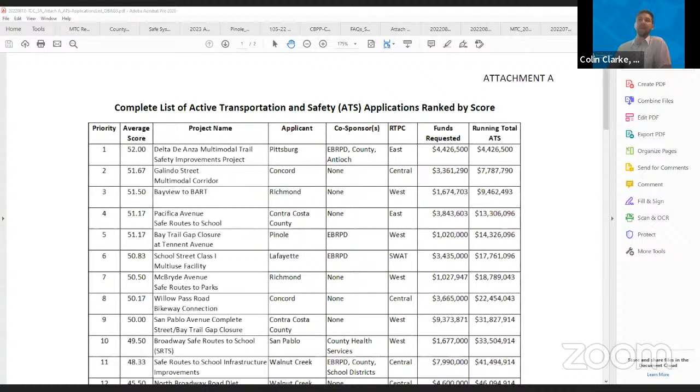This went to the TCC last week on August 18th, Thursday, and some feedback was received in regards to that, and then it'll go to Planning Committee September 7th and the board after that.

You can see the top 11 projects did make the proposed nomination list, with the exception of item number 10, number 9 from the county. The review panel discussed this, and because of the cost of the county's San Pablo Avenue Complete Street project, the SS4A, Safe Streets and Roads for All, USDOT grant program was chosen as a potential next step to get that project funded.

All right, thank you for that update, Colin. Do any members of the committee have any comments? Just raise your hand, either virtually or your actual hand. Corey, is this comments for the entire item, or just this section? Colin, are you accepting—I guess if you respond to Corey's question—is this the end of the OBAG presentation? Yes. Okay.

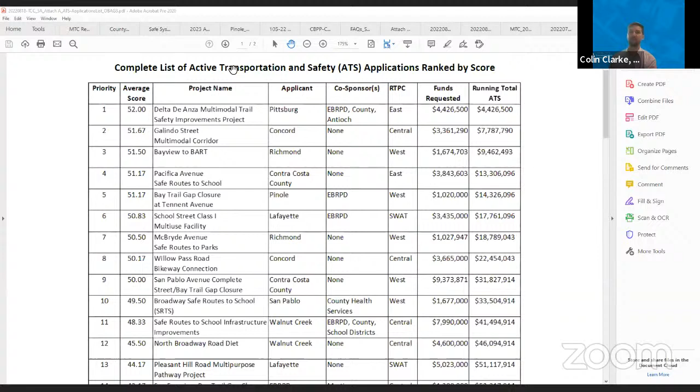So maybe I'll direct that question to Colin then, if it's a CCTA related question. I think it's something you might bring up during agenda item D2. The city will be presenting the complete streets checklist, and that's one of the ways that can address some of that scoping conversation. And from an OBAG 3 standpoint, I don't think CCTA has design guidelines required other than those that are encouraged from the countywide bike and ped plan on CCTA's website.

I'm sorry, is that going to be, you said agenda item D2, is that part of this meeting or a different meeting? Yes, this meeting today. Got it, okay, thank you. And I guess the other thing to look at too is if you go to the countywide planning webpage, there's a Vision Zero webpage, and there's a toolbox there that shows different treatments. So that's the other kind of design guidelines document that CCTA has in regards to these type of projects. Great, thank you.

I see Committee Member Dougan's hand up. Sean. Yeah, hi, Vice Chair Dougan here. I think maybe Colin, you might have just answered a follow-up question to this, and that is the link you just directed this committee to. To me, the general question I thought I heard was what are the procedures in place that ensure that what's being applied for is actually being implemented?

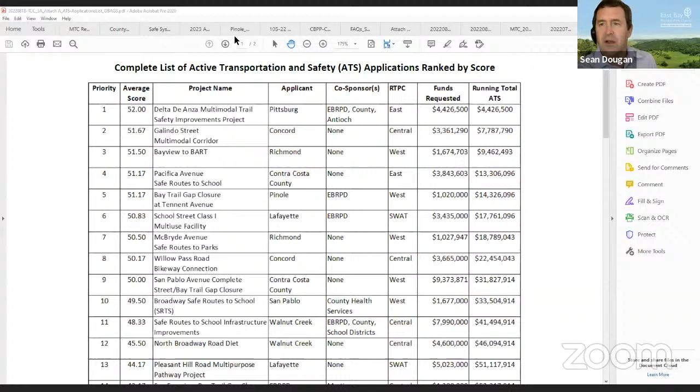Yeah, I appreciate that. So I guess there's a funding resolution that ultimately will be taken and reviewed by the planning committee and the authority board, which has a one-page attachment, typically with a more detailed scope of work. That's what CCTA can use to make sure that scope is met by the local agency project sponsor, and that's typically Measure J funded projects. This is OBAG 3, so it might be a little different since there's not necessarily an interagency peer review process at the 65% design stage, which is typical of Measure J funded projects. But still there would be a funding resolution with a scope of work that would include that.

I see Eric's hand up again. Eric? No, sorry, I just need to put that down. Thank you, okay.

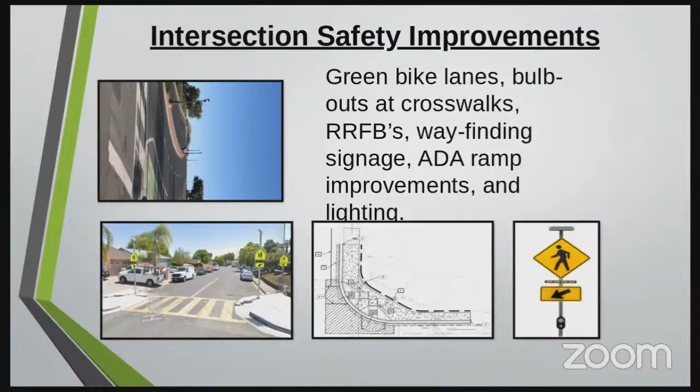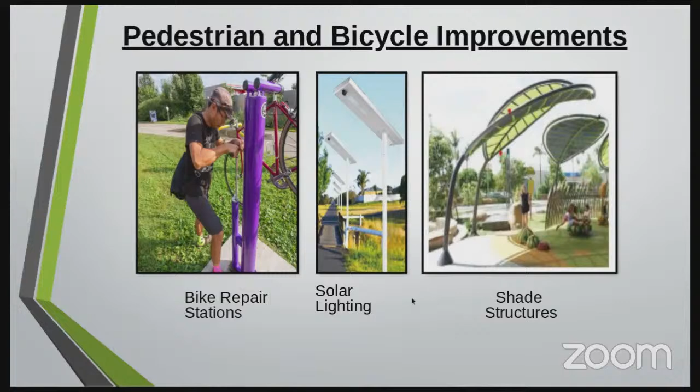In addition to the trail, there will be a lot of improvements: bike repair stations, solar lighting, shade structures, and a lot of these address the whole safety aspect, plus also green climate change considerations.

Similar to certain trails we have throughout the state, there will be some blue light emergency stations, additional wayfinding signage to show people where to stop by key destinations and where the trail connects, and improvements to some of the fencing along the Delta De Anza Trail as well.

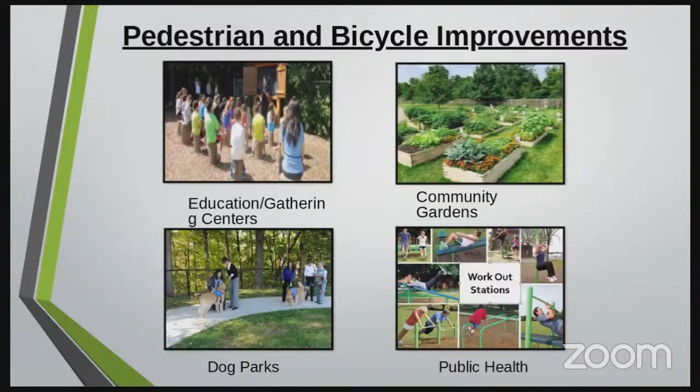It's going to be a collaboration with some school districts to incorporate educational gathering centers, community gardens, potentially dog parks to deal with the green waste, and also add some workout stations for the public.

Here's a few exhibits that we have. Exhibit A shows some of the improvements along one trail in front of a school: workout stations, community gardens that coordinate with the schools, and some green bike lanes to reconnect the trail through this quarter-mile radius back onto the trail.

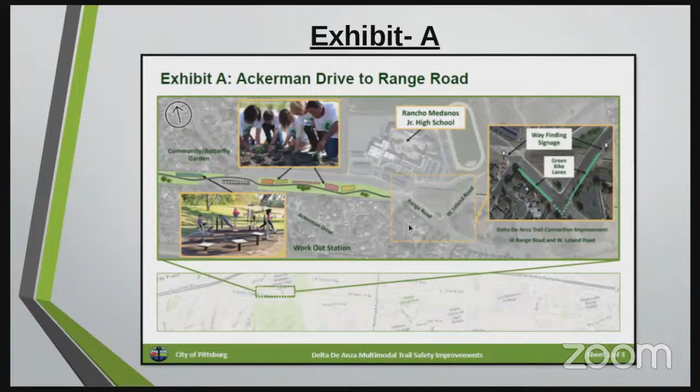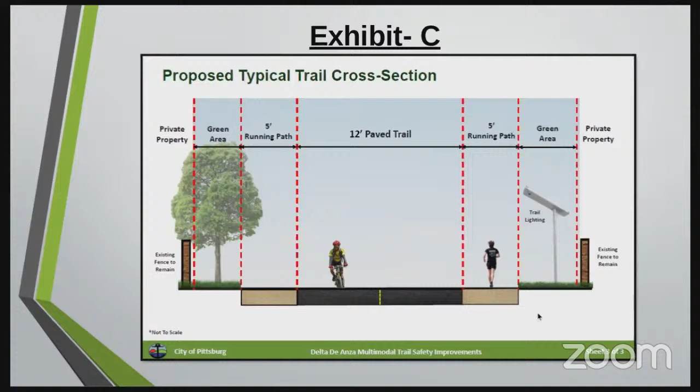Currently out there right now, the typical cross section has a paved path. There are some improvements that need to be made, whether it's drainage or repairing some of the patch pavements, also the running paths, and to really make some improvements for the dead space zones currently on the trail. So the main objective for all of this is to really tie the communities together and to utilize this path.

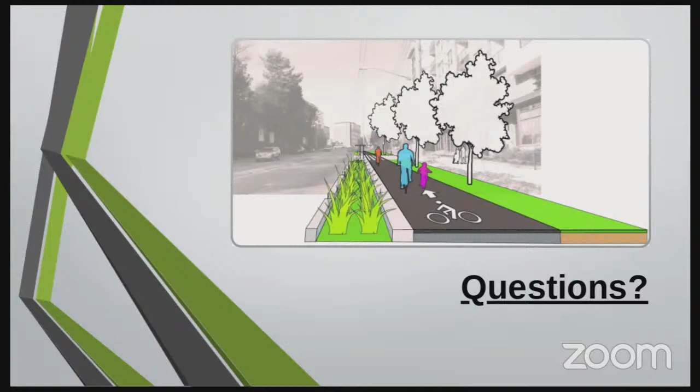As of right now, this trail alone, if you average all the PDAs, EPCs, it's a little bit over 70%. So per our Pittsburg Move Active Transportation Plan, we had a lot of outreach. There had been more than 50 outreaches throughout the last 3.5 years. And this comes up as one of our main priority projects within the city.

So the idea is to make this a regional project. Let's improve 16.3 miles of this trail, reconnect these communities within 3 areas to utilize the space to reach their key destinations, healthy lifestyles, peds and bikes, and I'm looking forward to implementing this project.

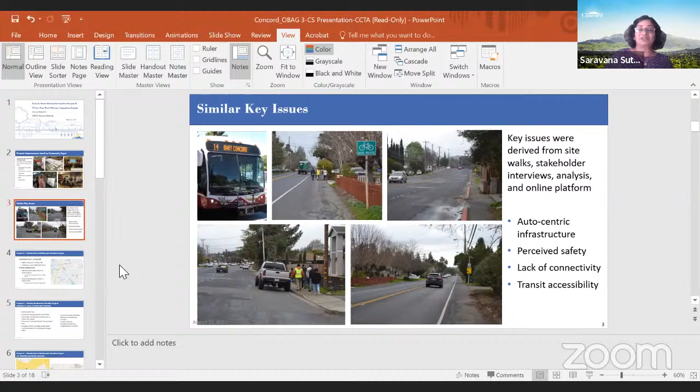So now looking at this, basically these two projects together form part of a larger network of bike and pedestrian improvements the city is looking to do, especially in the downtown area, connecting to many schools around the downtown area and to the businesses within downtown, and also connecting better to the BART station. So these two projects are kind of pieces of the puzzle, but eventually the city is looking to tie and make improvements to the entire network, so we will have a better, safer bike and pedestrian network to access all the businesses and schools and to the transit centers.

So now talking about the Galindo Street Multimodal Corridor Project, this is between Salvio Street and Clayton Road, and we are also looking at the Clayton Road section where we have the opportunity to improve for bicyclists. So the total project cost we are looking at is 4.2 million, with 20% matching funds coming from the city.

And in terms of the specific improvement, as you can see, between Galindo - I know this question was raised earlier in the meeting - between Salvio and Willow Pass, we are looking to do a class 2 buffered bike lane, combined with a raised landscape median. And between Willow Pass and Clayton, we are looking to do 6-foot landscaping on both sides, separating a class 1, 10-foot shared bike and pedestrian path.

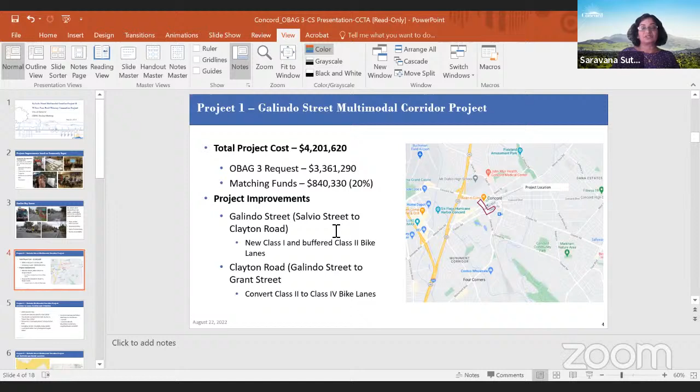In terms of relation to local policies and priorities on the complete street checklist, you can see the number of plans that have identified and included this improvement: the General Plan, Downtown Concord Specific Plan, City Bike Ped and Safe Routes to Transit Plan, and the Monument Community-Based Transportation Plan. The LRSP, going tomorrow for adoption by the City Council, also includes this one.

As I mentioned before, this connects to existing and future bike lanes in downtown Concord, which facilitates better and safer connectivity to all the businesses, schools, and to BART.

In terms of the regional active transportation network and safety analysis, as you can see on the slide, this is part of the regional AT network. The safety analysis data shows a high level of collisions, as you can see in the highlighted areas. So this corridor is located in a high collision area.

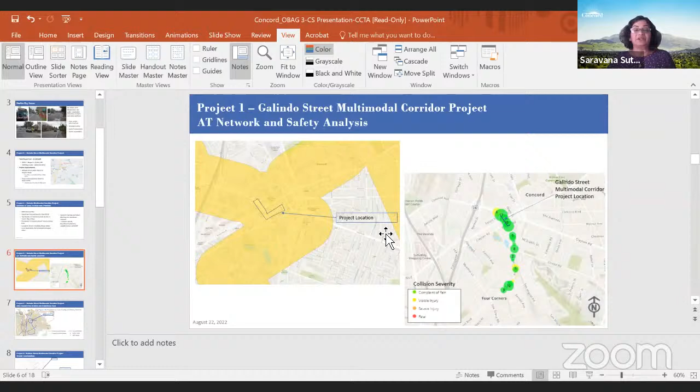The map scale doesn't show the length or linear portion of the project, but it's behind the dot here, as my cursor shows. It's part of the 2018 Countywide Bike Ped Plan and its proposed low stress countywide bikeway network.

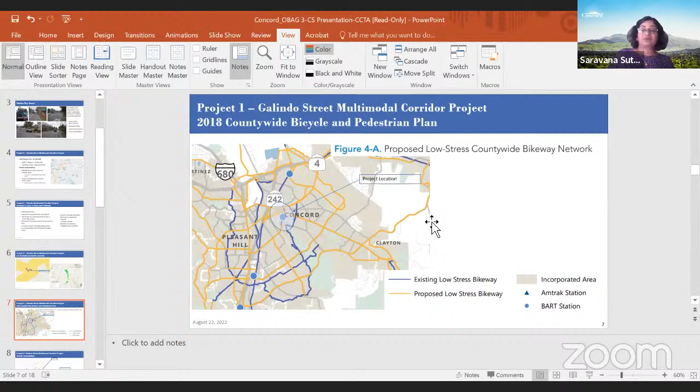For transit coordination, all of the buses that travel through connect to County Connection, go through the corridor, and connect to the BART station. It is also part of an equity priority community and part of the PDA, as you can see here.

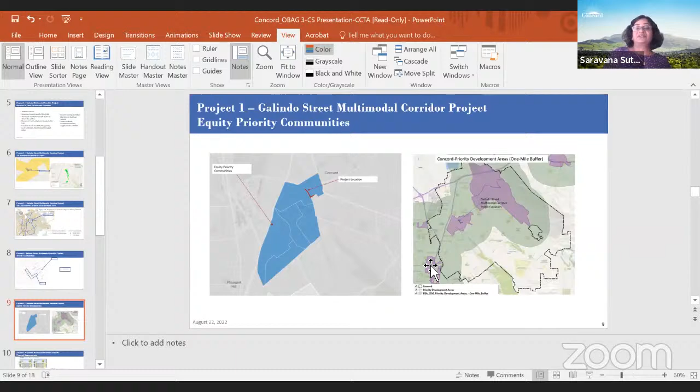So ultimately, the type of improvement we are proposing, as I explained, highlights a 10 foot shared use bike and ped path on both sides of the street, along with a buffered class 2 bike lane as the right-of-way dictates. We're converting the class 2 bike lane into a class 4 bike lane to the best level possible. This will all be finalized at the design stage in collaboration with the community and other key stakeholders.

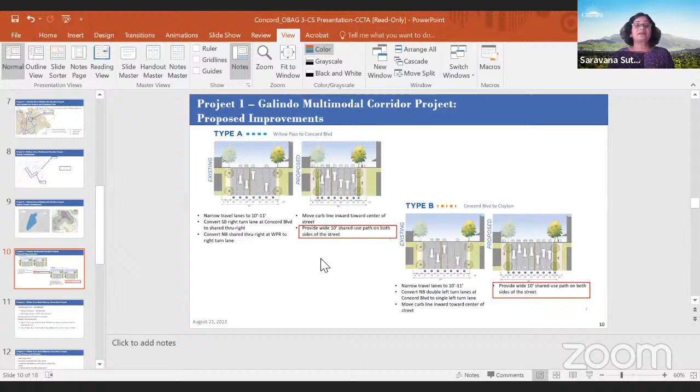So with that, I'm moving on to Willow Pass. I will stop here if the committee has questions.

Thank you, Saravana. Anybody have any questions on the first project here, the Galindo Street project? Any committee member questions, comments? All right, seeing none. Any public comment on this project? Okay, don't see any as well.

So, Saravana, please continue with the Willow Pass Road Bikeway Connection Project. Thank you, Chair.

The Willow Pass Road Bikeway Connection Project costs about 3.8 million, with about 11.47% required match coming from the city. This project is in a little bit more advanced stage; it's in design phase and anticipated to go to construction in 2026.

In terms of project improvements, we are proposing a class 4 two-way cycle track on Willow Pass between Landana and Parkside Drives. This is a big highlight. Because of right-of-way constraints, we are proposing a class 2 bike lane on Parkside Drive, which will connect to Willow Pass and to the bike lanes on Salvio Street.

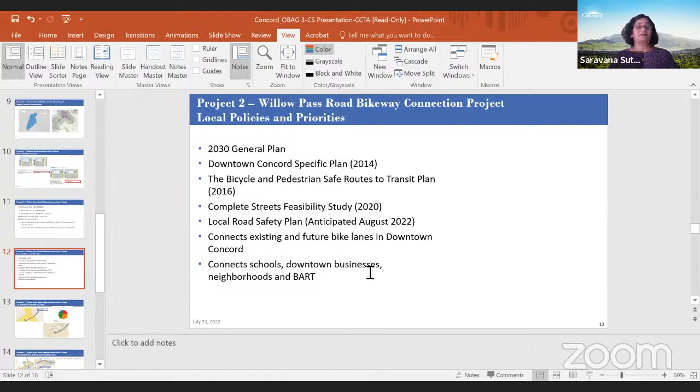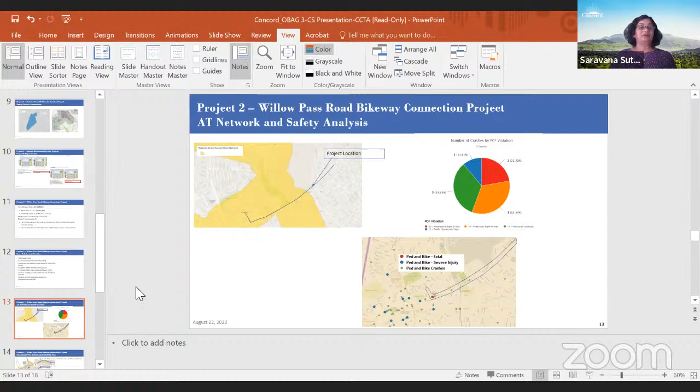This is also part of the Countywide 2018 Bike Ped Plan, and it's part of the low stress Countywide Bikeway network.

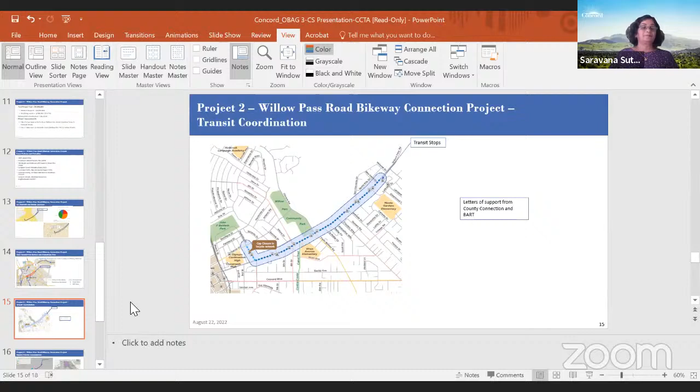On transit coordination, there are many stops on this corridor. This is a regional route, and it leads to connecting to the BART station. It is connecting to EPC, and it's very much part of the PDA.

In terms of the improvement, it includes a two-way cycle track from Parkside to Landana, and there is a road diet proposed by removal of one travel lane from Farm Bureau to Landana. It includes Class 2 buffered bike lane as much as possible on the one section where the right-of-way constraint exists.

So with that, I'll be open to questions. All right, thank you, Saravana. Questions from the committee—I see Committee Member Olson's hand up.

Hi, Bruce Olson, regular bicyclist. Those of us who regularly ride our bicycles are hoping that the Class 4 bike lane that is planned to end at Landana will be continued up to the Delta de Anza Trail as part of the development of the former Naval Weapons Station. Thank you.

All right, thank you, Committee Member Olson. Vice Chair Dugan. Hi, Vice Chair Dougan here. Saravana, does this project also include—if I recall—a treatment where the Contra Costa Canal Trail meets Willow Pass? I'm thinking it was a HAWK signal or some kind of crossing that was proposed, or am I thinking of a different project?

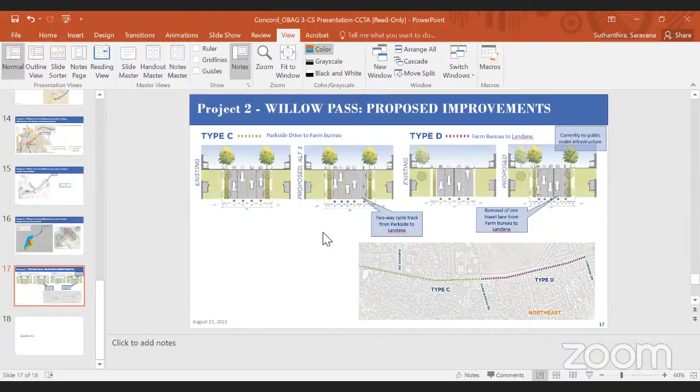All right, any other committee member comments? Could I follow on to Committee Member Dugan's concern with the crossing of the canal trail at Willow Pass as part of this project? Yes, we need that crossing to be safe, and I don't think the city of Concord is particularly concerned with building that crossing. So that's Mr. Dugan and now Bruce Olson expressing concern. Maybe the city of Concord could be concerned with that crossing also. Thank you.

All right, thank you, Committee Member Olson, for the comment. Any other comments from committee members before I move to the public? All right, seeing no hands up for committee members, I'll move on to the public, and I see Eric Owens' hand up. Eric? Hello, Eric Owens with Bike Concord.

For the Galindo project that is proposed, I believe that is the area where there was a fatality a few months back. There wasn't a lot of details on there. Is the proposal to have a paint-only bike lane on Galindo? If that was the proposal, I would be concerned with that. I think that is an especially busy area, and I do not think anyone would feel safe riding their bike in a paint-only bike lane on Galindo Street.

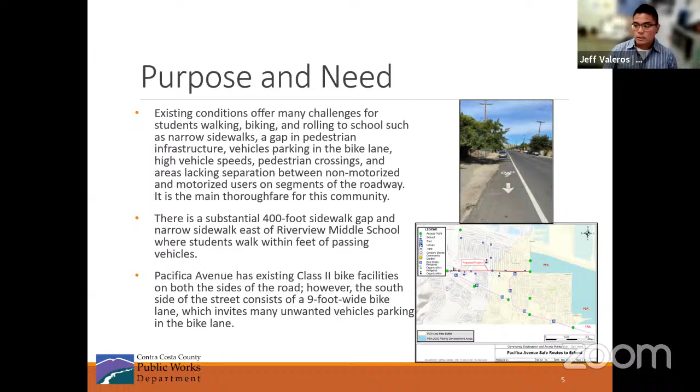This project proposes replacement of 2,400 feet of existing Class 2 facilities on the south side with a protected 2-way cycle track, as well as closing a 400-foot pedestrian network gap through a new 6-foot sidewalk, and construction of widened sidewalks, curb extensions, and raised crosswalks with high visibility striping to help students cross to access their schools and help slow vehicular traffic.

Do you want to pause here, Robert, or shall I go straight into the next one? We'll pause real quick and see if anyone has any questions on the Pacifica Avenue Safe Routes to School project. Any committee member questions, comments? Any public comment on this item, on this project?

Oh, I do see committee member Weeks, your hand up. Yeah, hi, sorry, just really quick, I'm too slow on the draw. No worries. I'm pretty interested in barriers and removing them or putting them in where needed, and there was a brief mention of some kind of barrier proposed at the cycle track side. Has there been any exploration of what kind of barriers these would be for here? It looks like a K-rail in that drawing, but I know that's probably just what the program gives you to drop there.

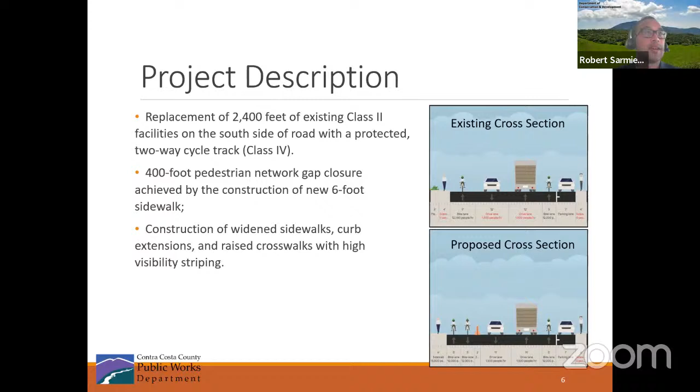Sounds good. The San Pablo Avenue Complete Street Bike Gap Closure, that was close. I've also presented this to the CBPAC, I think for ATP Cycle 5 and maybe 6. This project is along a 3.2 mile segment of the San Pablo Avenue corridor between the unincorporated communities of Rodeo and Crockett, from Pacific Avenue to the west, all the way to Pomona Street in the east. This project is located in the WCCTAC RTPC.

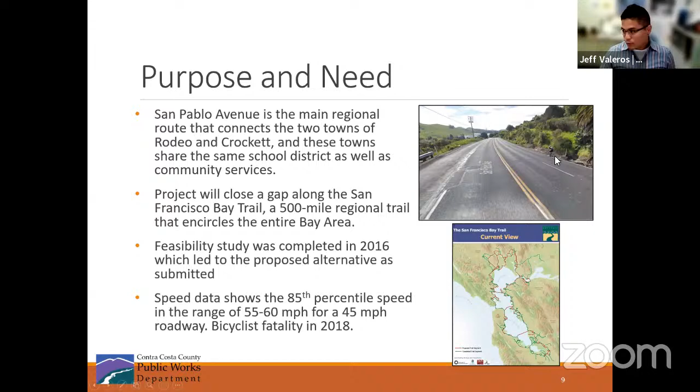The speed data shows the 85th percentile is in the range of 55 to 60 miles per hour for a 45 mile per hour road, and there was a bicycle fatality that occurred in 2018. You can see in this photo from Google Street View that there is a bicyclist here. This project is a 4-3 road diet for the 3.2 mile segment to install a Class 1 shared use path along the northern segment.

We're proposing a concrete barrier, especially given the speeds out there. This project also includes a 1,000-foot sidewalk gap closure in the Rodeo area, as well as bus stop improvements and a pedestrian hybrid beacon to help with local pedestrian circulation. And with that, I'll leave it open for any Q&A.

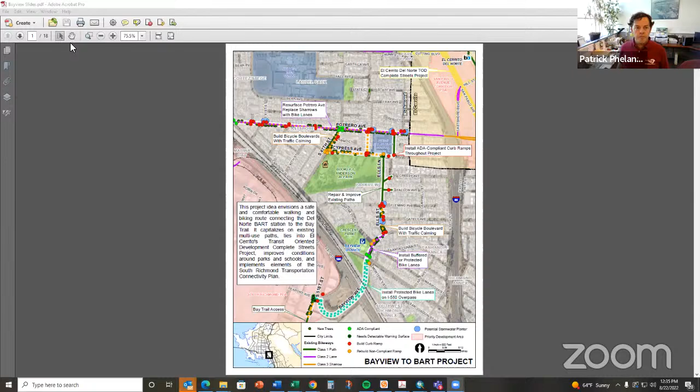This project envisions a safe and comfortable walking and biking route connecting the Del Norte BART station to the Bay Trail. It capitalizes on existing multi-use paths, ties into El Cerrito's transit-oriented development complete streets project, improves conditions around parks and schools, and implements elements of the South Richmond Transportation Connectivity Plan. There's kind of a lot going on this map, trying to show everything that we want to do.

Bike lanes on Potrero Avenue, bike boulevard treatments, the orange dashes on some of these smaller connector streets. Ells Lane is an existing multi-use path that is in need of upgrades and repairs. There's another small path along the east side of Stege Elementary. A short segment of buffered or protected bike lanes on Bayview, and then protected bike lanes on the Bayview overpass.

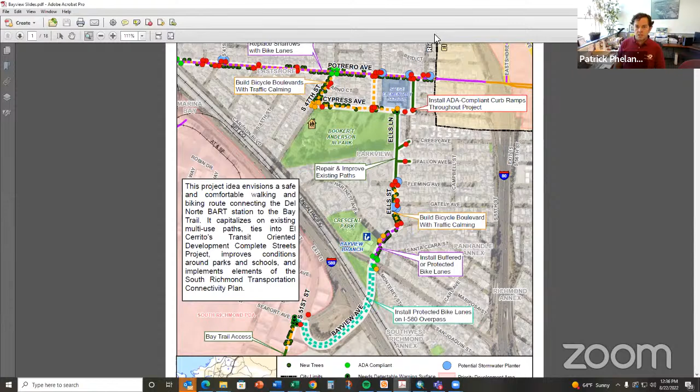One of the reasons we've selected this project is that we've been working with MTC on a quick build design for those bike lanes on Bayview Avenue.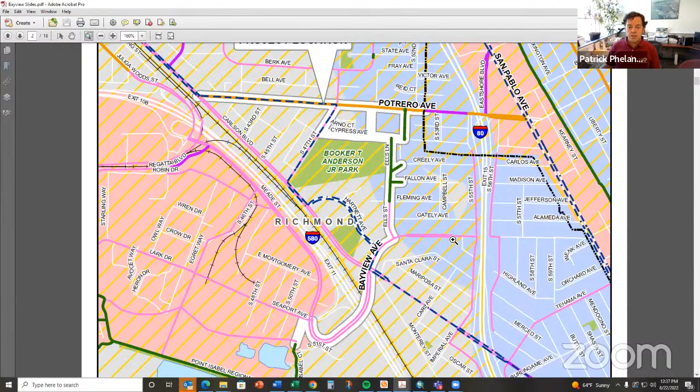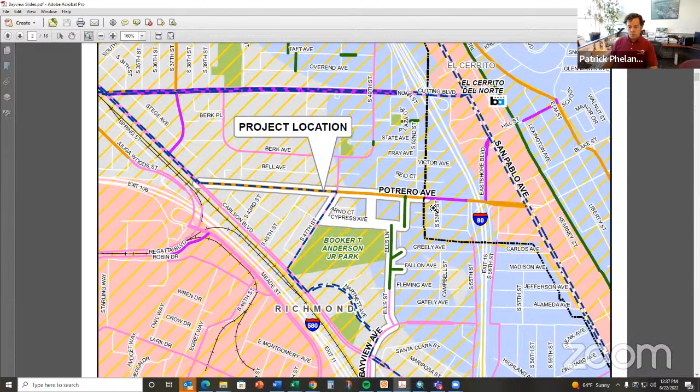And we're also connecting two of our PDAs, the South Richmond PDA on the left, and the San Pablo Avenue corridor PDA in El Cerrito on the north end of the project corridor.

Here are some quick clips of the design we were working on with the consultant hired by MTC. Here's a view of the Bayview and Carlson intersection, proposing a quick build protected intersection. This is a challenging location with a lot of vehicle traffic. There's no sidewalk on the north side of the Bayview overpass, so that also means there's no ped push buttons, which creates some interesting things for implementing the bike lanes.

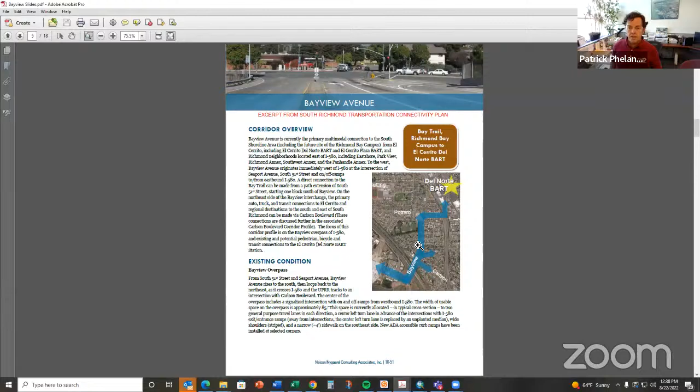Another reason we selected this project is that it implements the South Richmond Transportation Connectivity Plan. This blow-up pretty much outlines the corridor we are focusing on, using Potrero Avenue and East Shore to connect up to Del Norte. There's a lot of details in our plan that we are trying to implement.

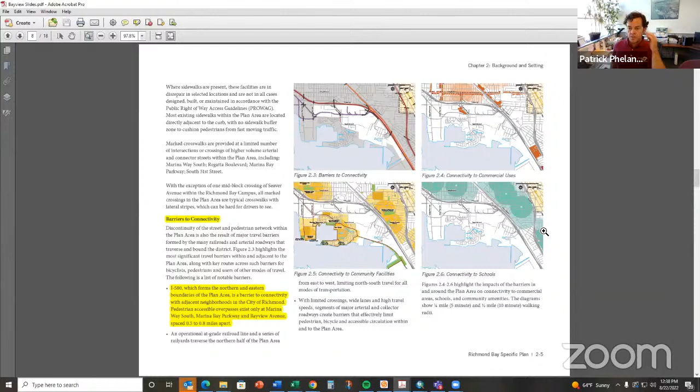This project is also supported by the Richmond Bay Specific Plan, focusing on redeveloping the empty space in the south shoreline between the Marina neighborhood and Interstate 580. You may remember there was the whole proposal to do a UC Berkeley campus extension that's on hold. There's also a Campus Bay development proposal for the area.

Here's some more highlighting. One of the biggest problems we have in Richmond is the freeways acting as barriers to connectivity. So that's a real goal of this project - getting people across 580, getting people from these equity priority communities to safely enjoy the Bay Trail and the waterfront and all the other connections you can get to from the Bay Trail in Richmond. It's not just for leisure - lots of people use it to commute to Berkeley and Oakland.

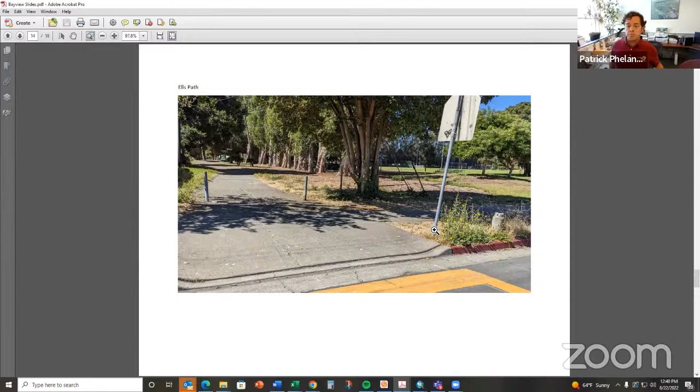This is the Ells path that's just south of that. If you were to turn around right here, you'd be facing right at Steege Elementary School, and that's Booker T. Anderson Park. This end has a nice curb ramp. Here's an example of some of the many pretty significant repairs and upgrades needed along this bike ped path. On the south side, there's no curb ramp at all. So a lot of simple but important improvements we'd like to make.

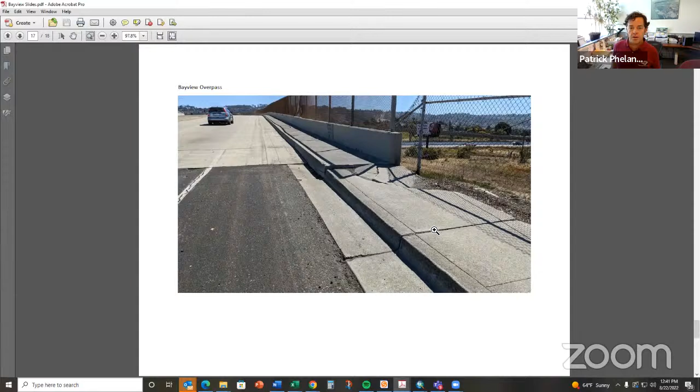Here we are at the overpass where there are significant sidewalk improvements that need to be done. You can also see there's a pretty wide shoulder that should be easy to convert into a buffered bike lane - we'll make the vehicle lanes a little bit more narrow. And then here's the entrance to the 51st Street connector path to the Bay Trail.

There's even one of our Richmond Common Ground etiquette signs up there, the green sign. We got a lot of support from the community, from Caltrans, Park District, John Gioia, City of El Cerrito, Rich City Rides, our own BPAC, our Trails for Richmond Action Committee, and Groundwork Richmond, who we will partner with for tree planting. I want to mention we included trees and some stormwater treatments on this project, and Bike East Bay and AC Transit. So those are all my slides for this project.

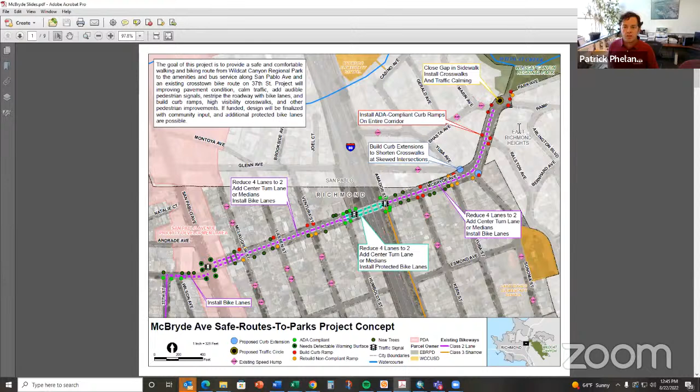Lots of curb ramps need to be built. All the yellow and red dots are showing non-existent or non-compliant curb ramps. There's also a couple of funky intersections that we would like to streamline so that the pedestrian experience is nicer.

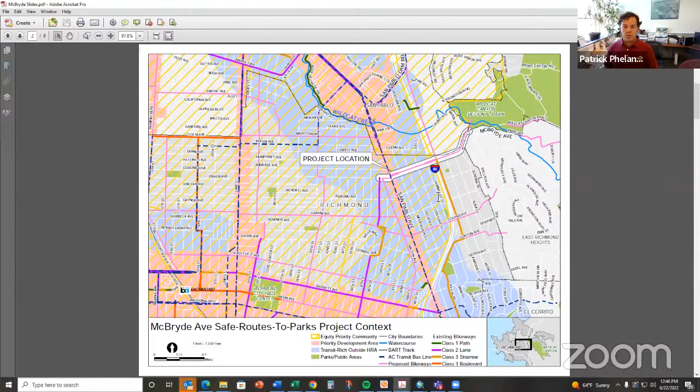Here's that complicated map showing context. The pink lines are proposed bike routes, so you can see this is a proposed bike route in our bike plan. This purple and orange line is what I was talking about, the existing bike routes connecting to our Barrett Avenue route, connecting you to City Hall. Yellow dashing is our equity priority communities, so the whole area to the west of I-80 is an equity priority community. The pink and blue are the PDAs and transit-rich areas.

Another reason we selected this project is that we had a failed slurry seal project several years ago that included several of our proposed bike routes, so we have what I would call a 65% design completed already. Here, this is with the buffered bike lanes. And then a few photos.

This is the funky intersection at the west start of this project, where there's an offset intersection. The idea would be to change that right lane to a right-turn-only lane and fit in a through bike lane there, which would of course be great for bicyclists, but it's also going to smooth out this strange intersection where when you're in that right lane, it's almost like you're going to drive into the gas station. So just having one lane is going to make that safer.

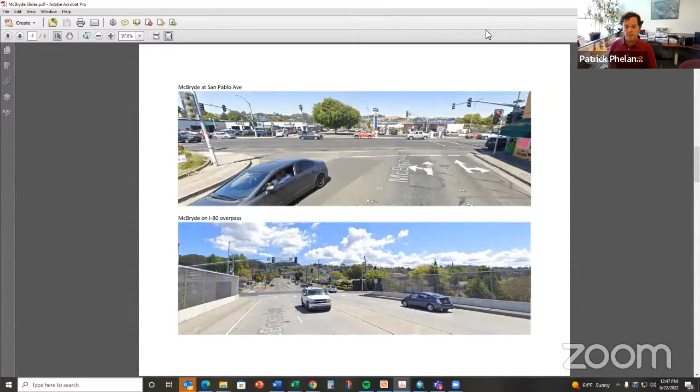On the bottom is a clip of the overpass over Interstate 80. There's no parking, which allows a lot of room for us to put in a protected bikeway, while also making sure we're keeping the appropriate numbers of vehicle lanes to make Caltrans happy. There's an off-ramp just behind here, and a lot of traffic is turning left here onto Amador Street, which leads you to San Pablo Dam Road, another way to get onto Interstate 80, but also a heavy traffic area out to the El Sobrante area.

This is an example of some of the tough ways to get through here on foot. There's these funky skewed intersections. There's not really a direct, obvious path of travel. There's no curb ramps. The road is overly wide.

So we're thinking of even closing off this little end of Glenn Avenue and turning it into a cul-de-sac so that there would be a nice sidewalk path of travel for people on foot. Also just provide some traffic calming for the neighborhood.

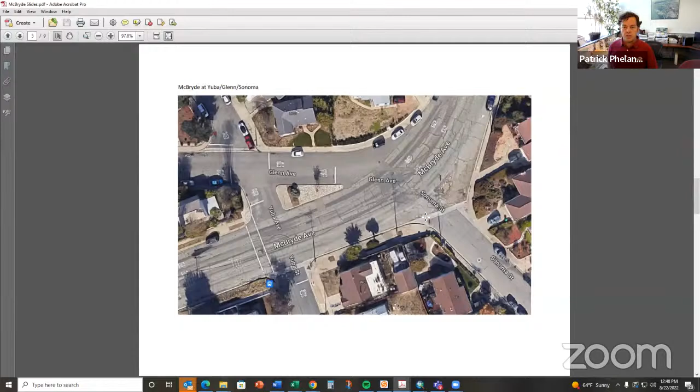Similarly on the east side of the road at Sonoma Street, some kind of bulb out, either concrete or a quick build version, to make things nicer for pedestrians and safer. Here's some pictures of those same locations.

Another thing we'll be using for our match on this project is that we've had a lot of complaints about the pavement on this segment. It's really torn up, and our in-house paving crew has added this to our paving schedule. So we would like to combine funds for all of these active transportation improvements with doing some of our own paving in-house.

And then also this intersection, this is the main entrance to Alvarado Park. If you don't know, Wildcat Canyon Regional Park is a really large hillside park, but then there's also Alvarado Park that's kind of a portion of it, and it's much more of a neighborhood picnic kind of park. And the main entrance is right here, just north of this Park Avenue label.

There's no continuous sidewalk on the north side of the street. There's no curb ramps. Arlington Boulevard, which you may know is the main route through the hilly part of this part of Richmond and unincorporated county.

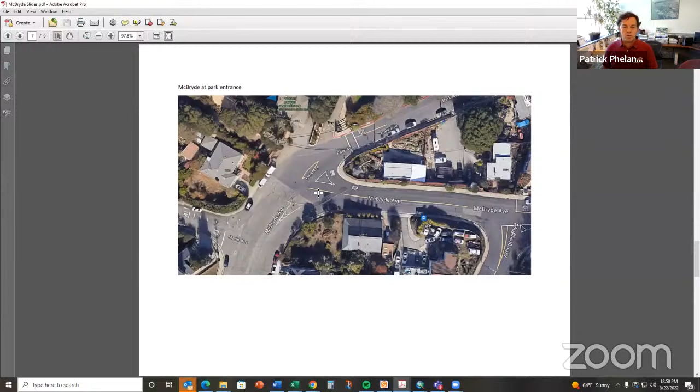And so all that traffic is turning onto McBryde and then on again left onto McBryde. So this is an intersection where we'd like to explore maybe a mini roundabout or other sort of way to make this more clear for drivers and safer for people on foot or on bike that are trying to get to the park. I've highlighted, look, we have bicyclists already on this route as well.

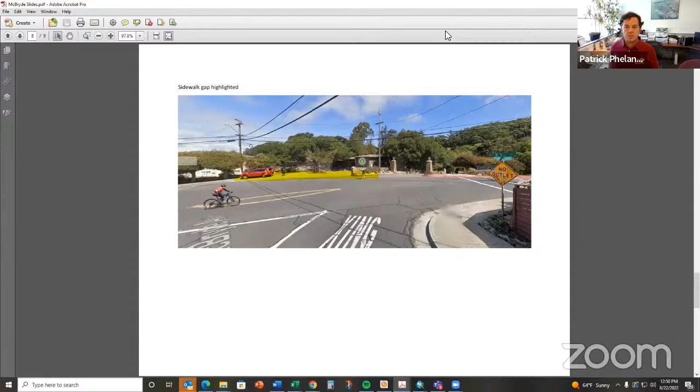And I highlighted in yellow where that sidewalk gap is that we would like to close so that on either side of the street, people can walk and connect to this wonderful park.

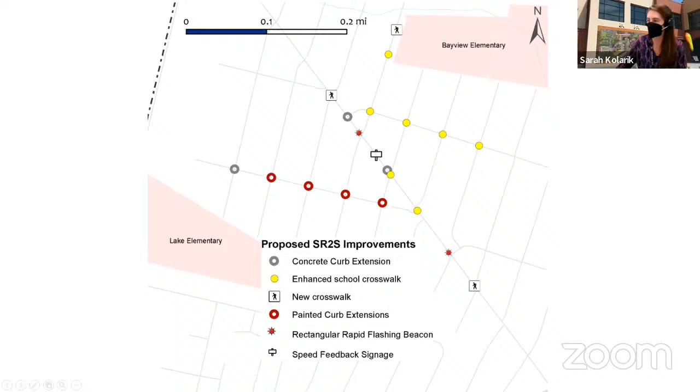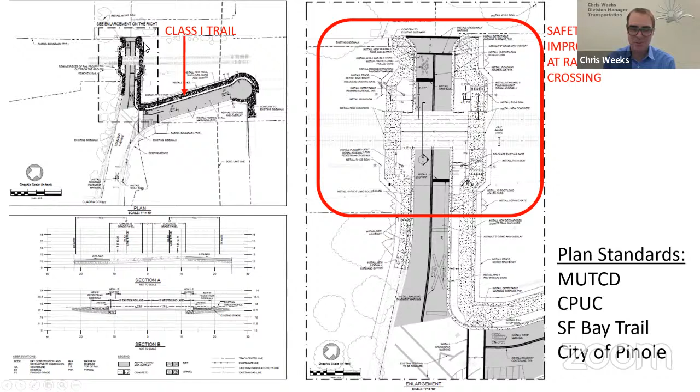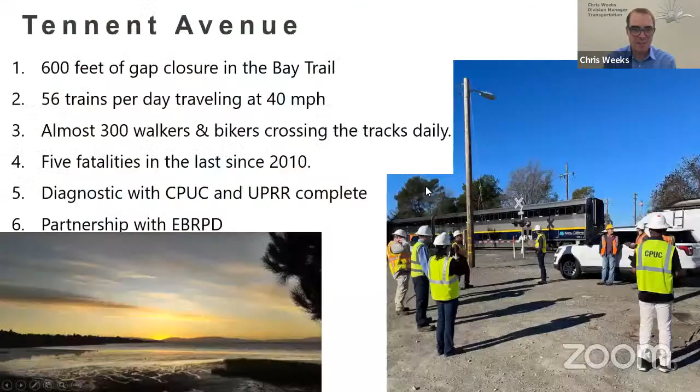That's a good point. I haven't had any discussions with them, and we haven't at this point, but hopefully someday someone will talk to the owners and bring it into the fold of the city or something like that. That would be really cool. But thanks for working on this, I appreciate it, it's really, really needed. It's pretty confusing right there, so congratulations on it.

When I was out here with my drone, I noticed the bikers and walkers kind of cross through this big, huge gravel area, which is nice to have as open space and feels somewhat safe, but we really want to direct them and be in control of where they're going. So this will really help.

Vice Chair Dugan: Thanks, Michael and Misha, for this. Obviously the Park District is a partner and collaborating on this, and is really excited about something happening here. We were unable to do this as part of the bridge project, but this is a long time coming. I wanted to point out that the traffic here is mostly pedestrian and bicycle, and we have a trail counter installed. The average daily trips in 2021 and 2022 were about 400, which is roughly 150,000 trips per year. So this is very, very well used and very, very much needed.

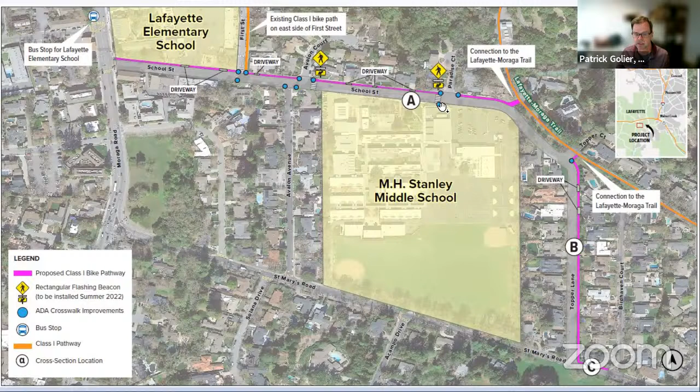I wanted to point out that there was a fatality in this crosswalk here by the Paradise Court intersection in September of 2021. Over the summer, the city started construction on a number of quick build projects along School Street, including a temporary bike lane, RRFBs at two crosswalks, and bulb-outs at this Paradise Court intersection.

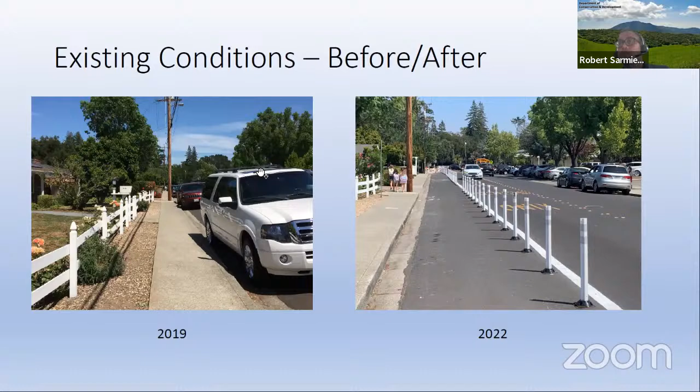I have a few existing conditions photos to show you the conditions along the street. The first photo, looking east along School Street across from Stanley Middle School, shows what conditions looked like in 2019. You've got parked cars along the north side of the street, so between those parked cars and parents stopping along the curb during pickup, students were only left with walking along this very narrow sidewalk with utility conflicts, and biking in the roadway amid all the pickup activity chaos.

Recently we legislated the removal of parking along the north side of the street as far as First Street, and installed a number of safety improvements, including this temporary bike lane which is out there today, construction of two bulb-outs as I mentioned, installation of RRFBs coming soon, and some ADA improvements.

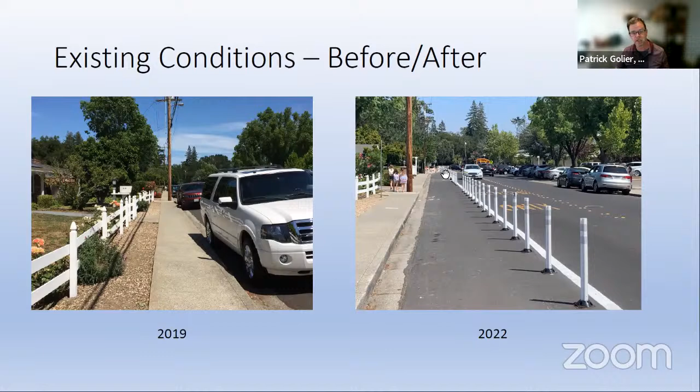Moving on to the Complete Streets checklist, the first question asks about the project's compliance with relevant plans. This project has long been envisioned in Lafayette. It's listed as Project 3100 in the county's Bike and Ped Master Plan, listed as the School Street Bike Ped Pathway connection to the Lafayette Moraga Trail, and it calls for a Class 1 facility on the north side of School Street.

In 2020, the city requested that SafeTREC at UC Berkeley conduct a complete street safety assessment for various locations within the city, and this area was one of three focal areas in that study.

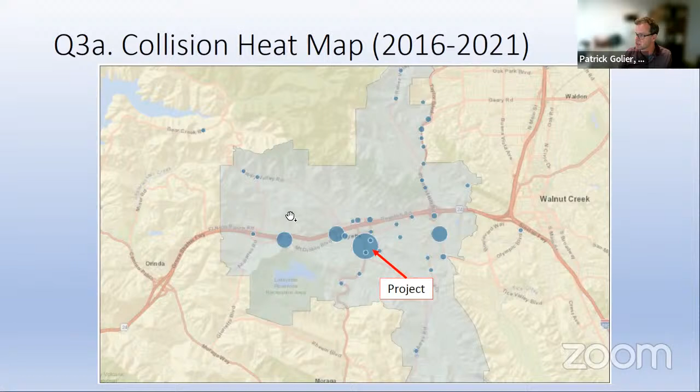Regarding safety and comfort, this is some SWITRS heat maps for the 5-year period between 2016 and 2021. There were 7 collisions in the immediate project area, including 6 involving pedestrians and 1 with a cyclist. This shows the project location is within the largest heat map bubble. This shows more detail about the collision locations and types. The fatalities are in red, including the one at the crosswalk that I mentioned, and the injury collisions in blue. Noteworthy is that all the collisions involved either pedestrians or cyclists.

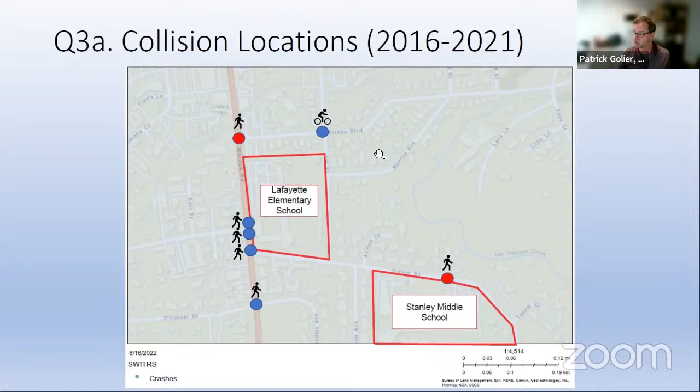There's a question on the checklist about the reduction in level of stress for bicyclists and pedestrians. That is the intent of the project, to meet LTS 1, delivering a physically separated active transportation facility comfortable and accessible for children at these two schools, but also for the greater population of Lafayette and Moraga.

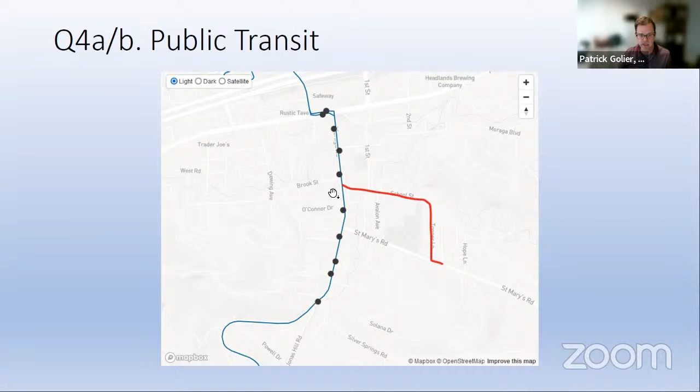Including our elderly, who would be attracted to the network of protected facilities that the project would contribute towards. This shows the public transit route. There are no potential impacts to buses, but I have reached out to County Connection, and they don't anticipate any impacts to their service with this project.

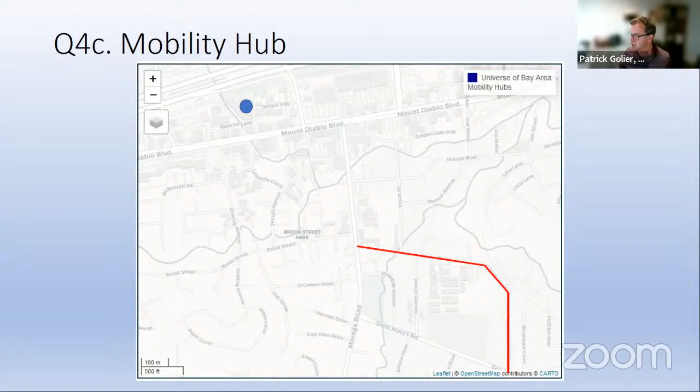The nearest mobility hub question on the checklist is at the Lafayette BART station right here in blue, approximately 3/4 of a mile from the project area. This project would support that mobility hub regardless of whether or not it's part of this project area, because we are closing a gap in our all ages and abilities active transportation network in downtown Lafayette.

We are going to meet professional design standards, HDM Chapter 1000 guidance for Class 1 bikeway facilities, and we would strive to meet NACTO design guidance as appropriate for this street.

Thank you for your consideration, and I'd love to take any questions or comments that you might have.

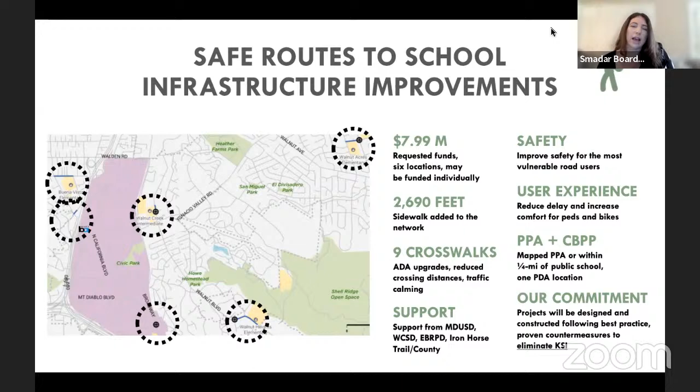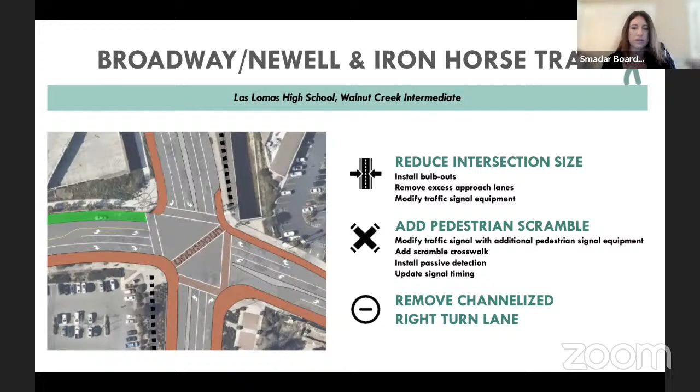For this project, we are requesting 2.21 million, and this would result in increased safety and comfort for pedestrians and cyclists, reduced delay for those active modes, reduced turn speeds and crossing distances, and provide that exclusive phase. Again, this provides for those schools in the area, for those older students who truly would be walking and biking. This is a PDA and PPA, and it's impactful.

So this is a regionally significant connection. It is on the active transportation network for MTC, identified as a gap in the network. And the Iron Horse Trail is a backbone in Contra Costa County.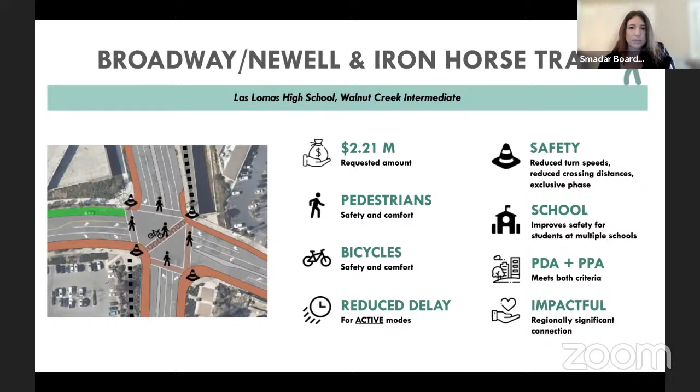These 3 additional locations for the gap closures - we have one at Walnut Creek Intermediate, it's 120 feet of sidewalk, and then also we'd be enhancing a crosswalk by providing a bulb out. This would also act as traffic calming.

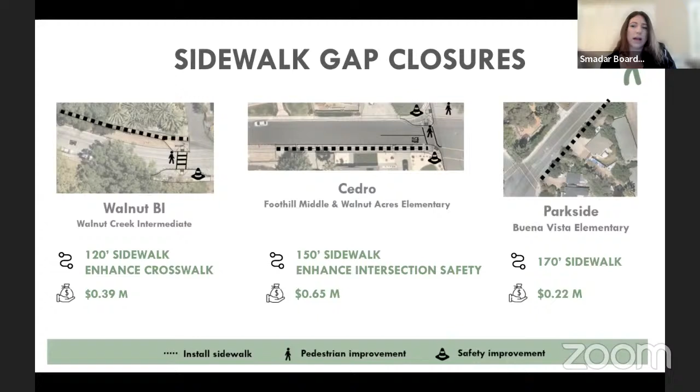And the final location is on Alvarado, which would provide sidewalk where there is absolutely none along the frontage for one of the elementary schools, and it's 850 feet of sidewalk. There would also be some crosswalk enhancements at the intersection on the right side of the screen.

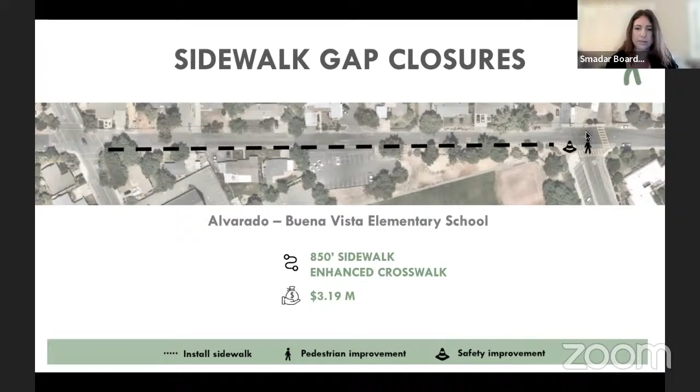So, sorry about that. Let me get to the last slide there.

So from a phasing standpoint, talking about the complete streets checklist, we're looking at engineering construction for all of those locations, except for the Walnut Boulevard at Walnut Heights location that I had mentioned previously. All of these locations are supported by policies in the general plan and pedestrian master plan.

The Iron Horse Trail corridor plan also calls out for improvements at that at-grade crossing at Newell and Broadway. It's in our CIP. The Olympic Boulevard corridor trail also calls for improvements at that Newell and Broadway location. Again, that active transportation network, the Broadway Newell intersection falls within that area, along with Parkside and Walnut Boulevard at Walnut Creek Intermediate.

From a Vision Zero perspective, we touched on that, but the Broadway Newell intersection does fall on the MTC high injury network, and it's also identified as a hotspot in the local road safety plan for the city, or the preliminary findings. From a transit coordination standpoint, a couple of these locations do have bus stops, and any improvements made from a pedestrian infrastructure perspective would just make it more accessible to get to those bus stops, or those bus stops would also see some enhancement with new sidewalks.

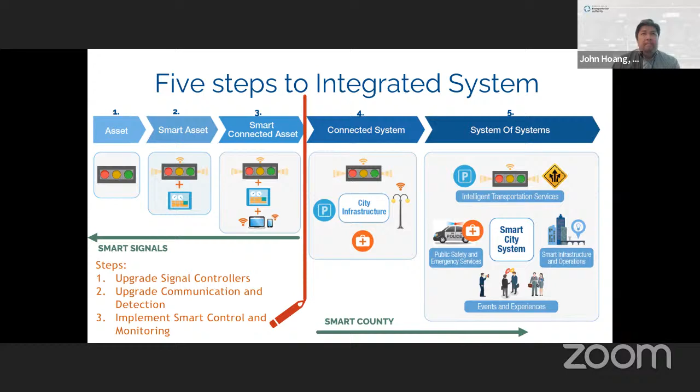These are some of the improvements I mentioned, just the low-hanging fruit of the controllers, but ultimately we're going to build it up. There's all types of equipment applications out there. I mentioned pedestrian safety, but ultimately I think what makes this work is fiber optics.

Fiber expands the bandwidth for this communication and really allows a lot of different equipment, such as video detection. We're looking at video detection for not only vehicles but for bicyclists — I've seen that actually work in the peninsula. The fiber optics will improve communication and enhance us, allowing us to not only interconnect and coordinate signals, which a lot of folks already do, but also do other data analytics.

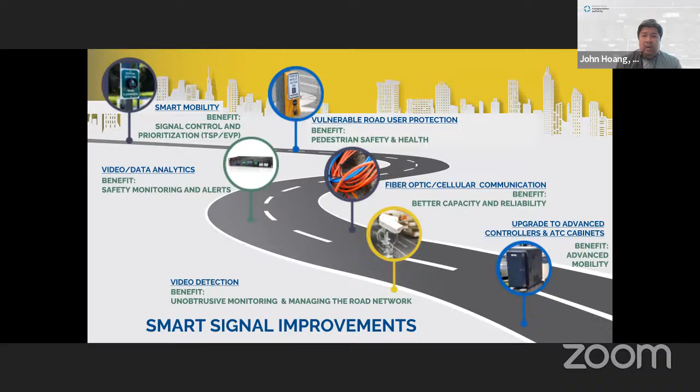There's a lot of technology out there that allows folks, or us, to analyze potential collisions, close call collisions, and so forth. I'm not going to go through all of this, but this is a long list of what we hope to get out of the system.

I'll focus on the intersections as we're meeting with all the cities. We've identified the intersections, working with the cities, and looked at some criteria, including routes of regional significance. We included PDA because we were going after the OBAG 3 grant, so if routes are within the priority development area we included those, along with the presence of bike lanes and the frequency of pedestrian and bicycle collisions. There's an equity component too, not necessarily geographical, but things like equity priority communities, plus traffic volumes and other information.

So this is a snapshot of the whole county: 652 traffic signals on the regional routes of significance. This map's purpose is to portray where all the signalized intersections are and all the data points within the whole county. As you can imagine, when meeting with individual cities, towns, and the county, we zoom this down from the 30,000 foot level to the 10,000 foot level. So for each city, if you're interested, we have that data at the city level.

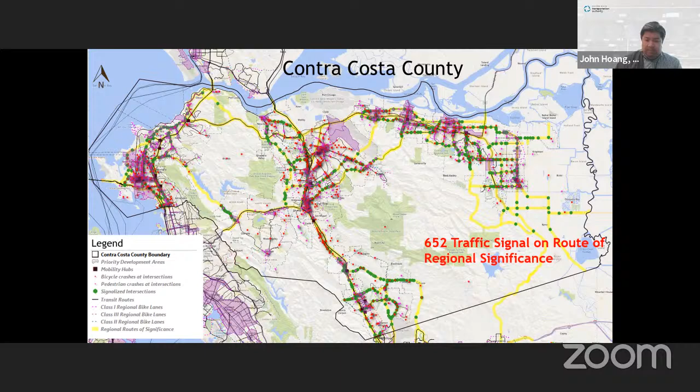So out of those 600-something traffic signals, we've identified 327 signals — actually the number is one less, 326. You can see where these signals are. I don't know where the legend went on this map, but again, it's on your major corridors. There's really no surprises — it connects PDAs and is located within PDAs.

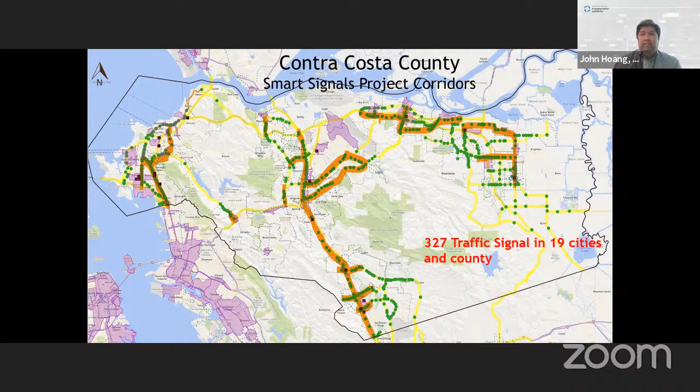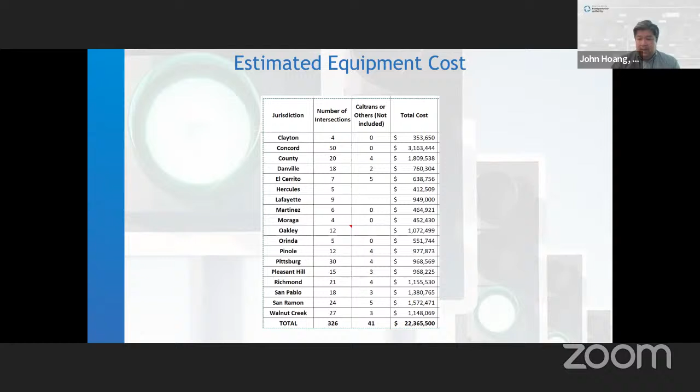Keep in mind, going back to this slide — this equipment and construction cost, as part of OBAG 3, we're asking that each city contribute an 11.5% match for the equipment deployed within their respective cities. The rest of the cost will be funded by other OBAG 3 funding and Measure J, CCTA's money, which includes design. We're actually at the stage now of doing a concept of operations. With that, I'll answer any questions. I'm going to stop sharing.